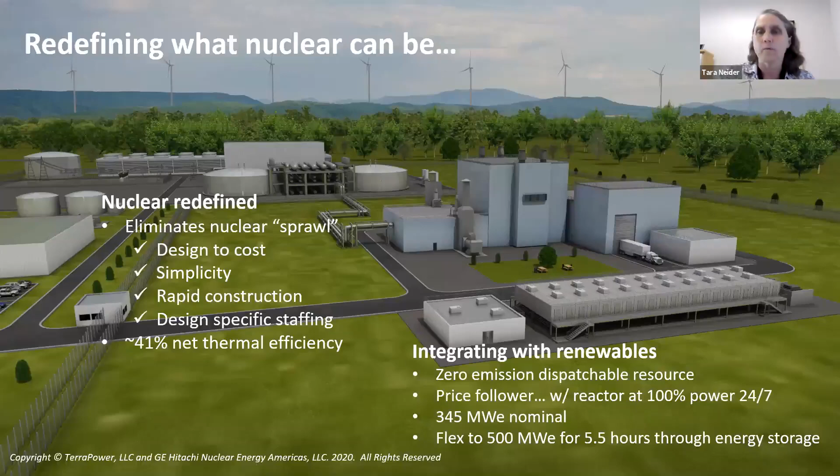So both companies are really passionate about sodium as a coolant. It has properties that facilitate a fast spectrum. It's not a moderator like water. We operate at very low pressures and high temperatures.

There's a significant delta between the melting point and the boiling point of sodium. At room temperature, it's solid, so you can transport it. It melts at a really low temperature, so when you're not producing power, you can keep it still above the melting point. And then, of course, you've got a really big delta to boiling, so you don't have to worry about the coolant boiling away.

The sodium metal is non-corrosive, which leads to long life components with less maintenance. The plants that have been running for decades showed no corrosion from the sodium. It's also highly compatible with the structural materials in the fuel. And finally, it has really high thermal conductivity, which results in easy decay heat removal.

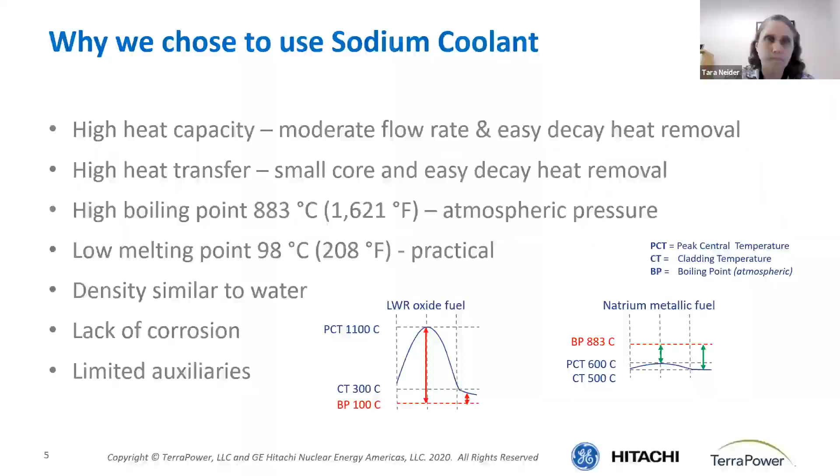GEH and TerraPower have reinvented what nuclear can be. We largely started by blowing away what a reactor looks like and breaking it into its individual parts. Then we started putting it back together, and nothing was considered sacred. We even considered the merits of a loop reactor instead of a pool reactor. We looked at a thermal spectrum reactor rather than a fast reactor, but we ultimately settled on a sodium fast reactor of the pool type.

And we kept some of the key parts of both the TWR and Prism. Starting with the basic concept, we tried to reinvent things in different areas to focus on the economics. We have new fuel, significantly smaller safety case, we've simplified the buildings, provided space-efficient heat exchangers, improved the fuel handling, and incorporated a passive reactor vessel air cooling system, to name a few.

But the most visible change you can see is really the incorporation of the integrated energy storage system using nitrate salts. Instead of a sodium intermediate loop, we replaced it with molten salt. And the funny thing is, a sodium reactor is actually a really good temperature fit for the molten salts currently being used by concentrated solar power plants, maybe even more so than molten salt reactors, and that's because of the temperature that they run at.

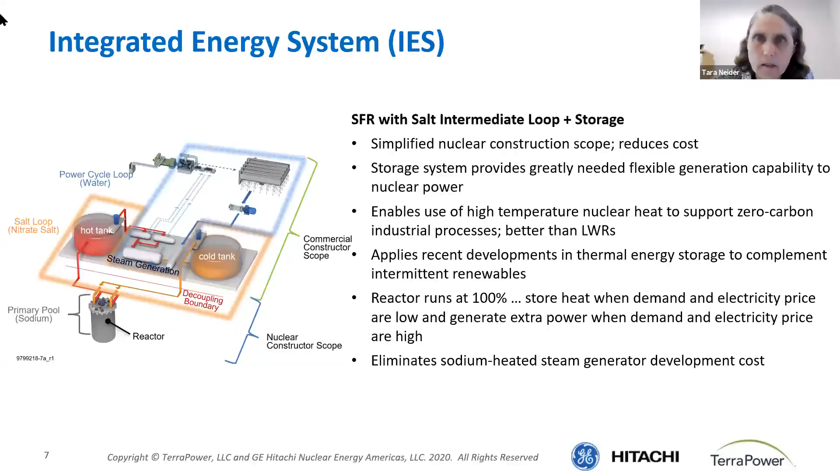Natrium has many special features, and I'll run through a few of them. The building spacing is developed for parallel construction, nuclear and non-nuclear, and allows for construction access. The building construction can be modular when it's most economical, but not necessarily modular. We don't do modularity just for modularization's sake, it has to be economical. And the site spacing allows distance for security.

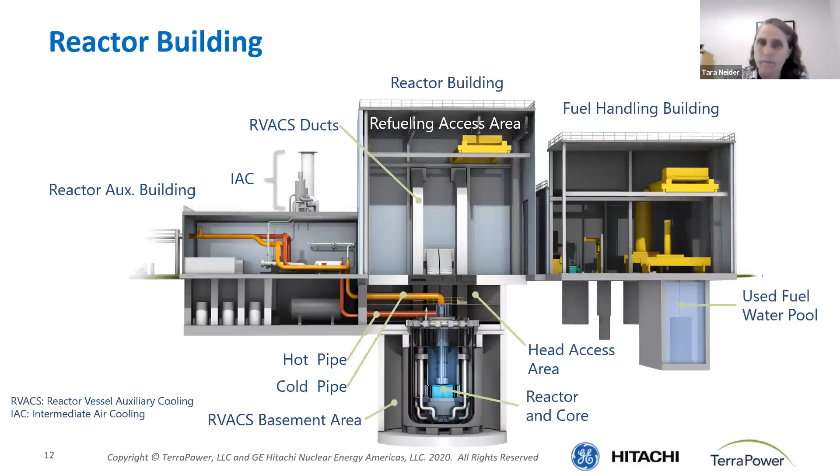This is a cross section of the reactor building. As you can see, the reactor itself is underground, and it's a pretty simple structure. We don't have many internal walls because there's nothing really to protect there. Really, all of the power generation is in the reactor itself.

So what's different? Natrium is leveraging inherent safety to drive out costs in construction and staff necessary to operate the plant. The Natrium safety case is compact and essentially constrained to the reactor module itself.

Safety-related heat sink is in continuous operation because it's air that's flowing by the reactor. There's no control function required to activate the heat sink. Control rods are inserted by gravity, so you don't have a safety-related operator function required. The coolant is liquid metal, so there's no high pressurization or phase change, which could challenge containment of the radionuclides.

And all this drives an open floor plan reactor building, which is easier to construct because there are very few internal walls and very little equipment inside the reactor building other than the reactor itself.

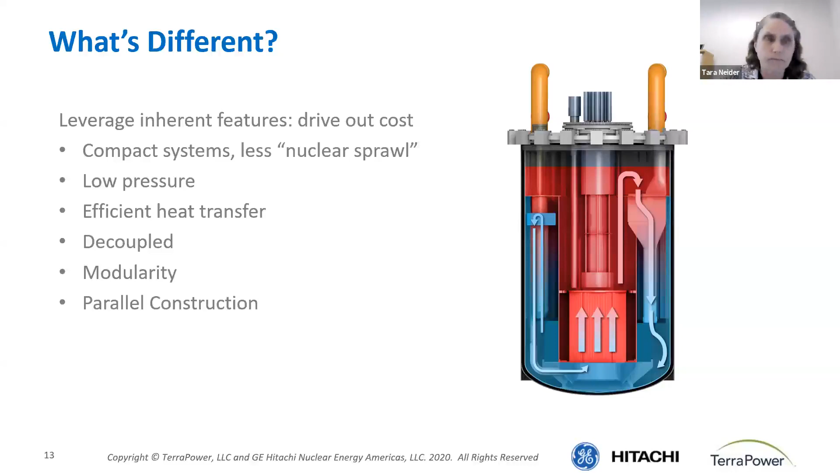This is just a picture of the simplicity of our Natrium radiant vessel cooling. As you can see on the LWR side, there's a spider web of piping and a lot of Section 3 piping welds. Its safety case is not compact. It takes a lot of external piping, valves, heat exchangers to contain the pressurized water so it doesn't boil out of control. On the Natrium side, it's very compact, enabled by our coolant, which is extremely thermally conductive and remains liquid at essentially atmospheric pressure.

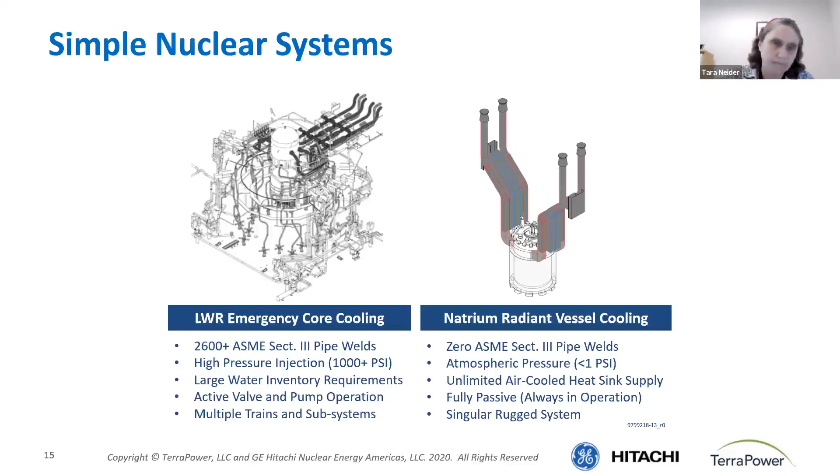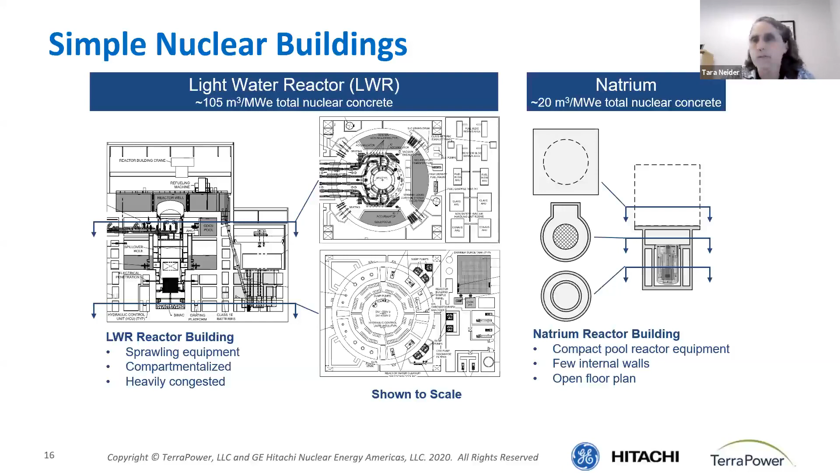This is because our safety case is so compact, there's very little that we need to put into the reactor building. The reactor building contains the reactor, and that's about it. This is another comparison of the light water reactor building versus Natrium, and here's another view of that. The open floor plan of the Natrium reactor building has almost no internal walls, which saves on schedule and cost for construction.

And finally, to summarize, we tried to make Natrium as simple as possible with inherent safety. That eliminates a tremendous amount of support equipment and nuclear piping. We have exceptional heat transfer, passive air cooling, and run at very low pressure.

We're learning from adjacent industry innovations and really focusing on cost instead of nice to haves. I think in the past, the nuclear industry was so focused on the licensing process that we kind of forgot about the economics. We lost sight of that, and we were able to set our own costs because we were different from everybody else.

But now we realize that has hurt the nuclear industry. We now need to focus really on how we can make nuclear power cost effective, while still ensuring that it is safe and efficient. And we believe that Natrium has done this, not through complicated safety equipment, but by making it simpler so that it operates very simply and it's naturally less expensive. So thank you.

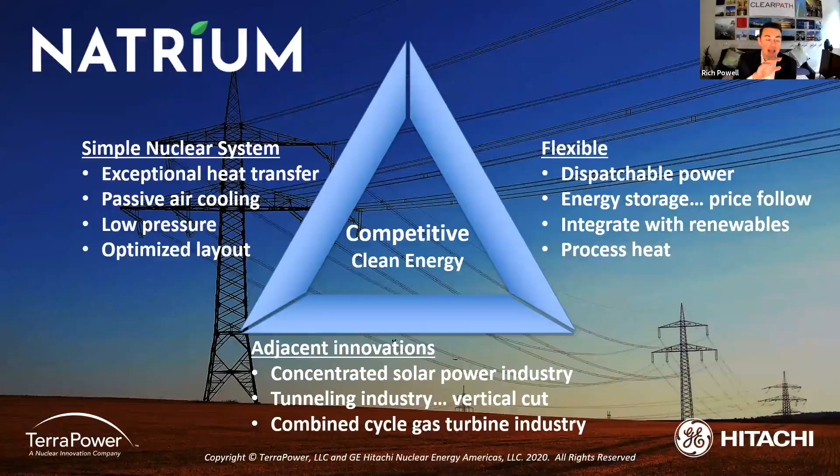ClearPath was really happy to be part of the rollout a couple weeks ago of the Clean Energy Ministerial's Nice Future Initiative, the advanced nuclear part of the Clean Energy Ministerial. We've had a campaign on flexible nuclear energy, which is kind of a paradigm shift in the space.

And this is a design that potentially really offers that. The first report by Lucid Catalyst coming out of that campaign showed that a reactor that could operate flexibly and achieve an overnight capex of something like $3 a watt or $3,000 a kilowatt could actually operate competitively even in the pretty punishing environment of U.S. wholesale power markets, even with limited policy intervention.

It sort of seems like you've created a design which could potentially do that. It is pretty jarring to the perception of nuclear, though, as just a baseload unit. How have you started to think about changing that perception, that by integrating storage in this way, you could play in a more flexible way in a power system?

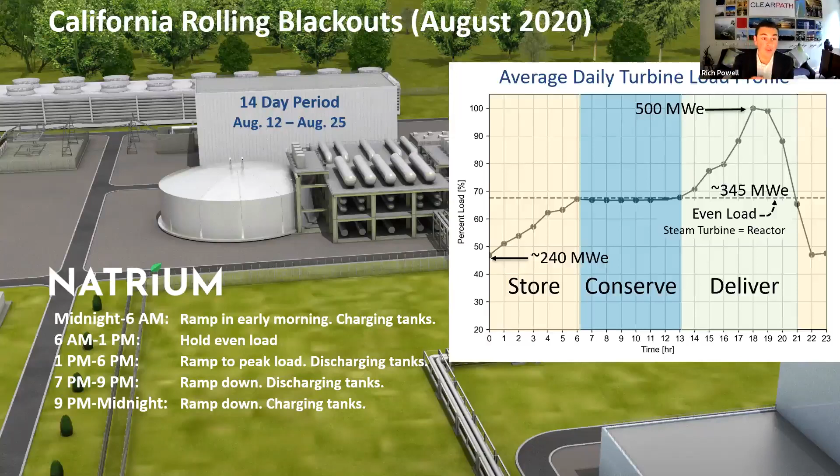I think unsurprisingly, we have a question about cost at the top of this list. Obviously, the nuclear industry has many examples of strong claims on cost which were then challenging to pursue. I wonder if we could talk a little more about that—this is probably for Chris Levesque and Tara. Just for example, because you're going to operate in this flexible way, you've got a larger turbine than would be justified if you were just running that all the time directly off the nuclear island. So a 345 megawatt electric reactor with a 500 megawatt turbine—doesn't that inflate the cost, or how do you think about a trade-off like that and still maintain cost?

Sure, I'll start and I'm sure Tara can supplement. We're a technology company, so when we think about our new designs, we think about what are the technology enablers to lower costs, what are the technology enablers to more safety, et cetera. Because we're in technology space, that's where we're starting.

Some light water reactor designs, as they improved from Gen 2 to Gen 3, the technology didn't really change fundamentally. They implemented passive safety features, risk-informed licensing, those kinds of things. But when we moved to Gen 4, we really changed the physics, we changed the basic topology of the plant. So we have a whole new horizon to work with for improving on cost, improving on safety. So what is that new horizon?